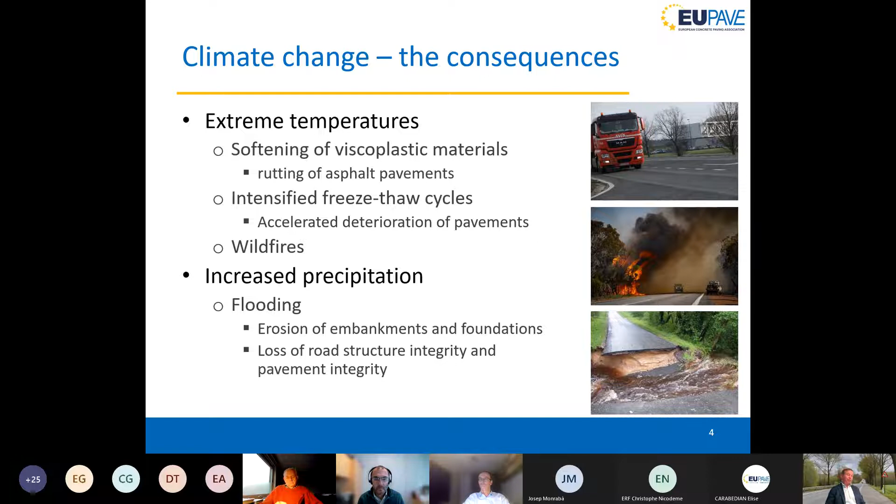And yes, we could be a bit more optimistic. However, if we look at the figures published by the European Environment Agency and the Joint Research Center of the European Commission in their technical reports, then it is not all that optimistic.

2011-2020 was the warmest decade ever recorded, with global average air temperatures reaching 1.1 degrees above pre-industrial levels. And the rate of increase for human-induced global warming is now about 0.2 degrees Celsius per decade.

An increase in frequency and duration of extreme temperatures is also projected, mainly in southern Europe. The projected increase in weather-driven fire danger in southern Europe is about 30 to 40% by the end of this century, compared with the end of the past century.

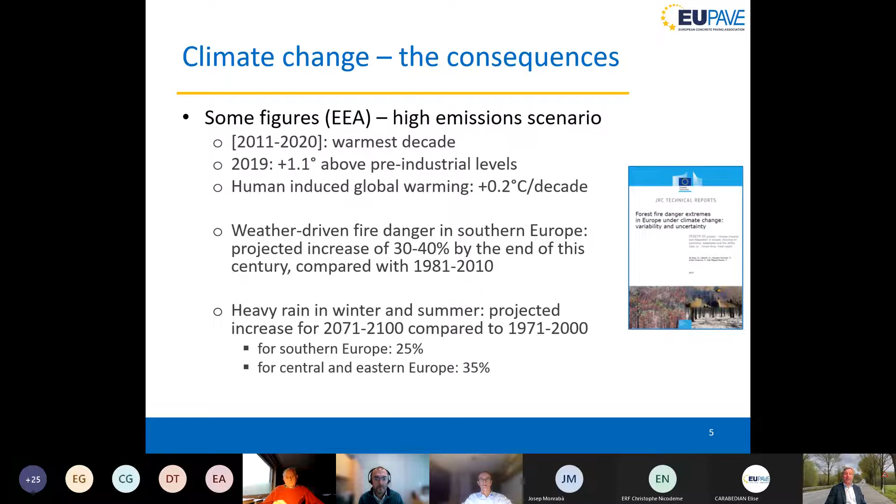The same is true for heavy rain in winter and summer for Europe. So by the end of this century compared to 1971-2000, you see increases from 25 to 35%. That is enormous.

Another consequence of natural disasters is the necessary removal of debris. Unfortunately, trucks carrying debris are unavoidable in the event of severe damage after floods or wildfire events. This transport consists mostly of heavy goods vehicles driving on roads that have not been designed for that. It means an increase in unevenness, less smooth surfaces, and also a faster degradation for asphalt roads was observed by researchers in comparison with concrete.

We know that rigid concrete pavements are less impacted by overloading and provide the highest resilience to flood and wildfire damage.

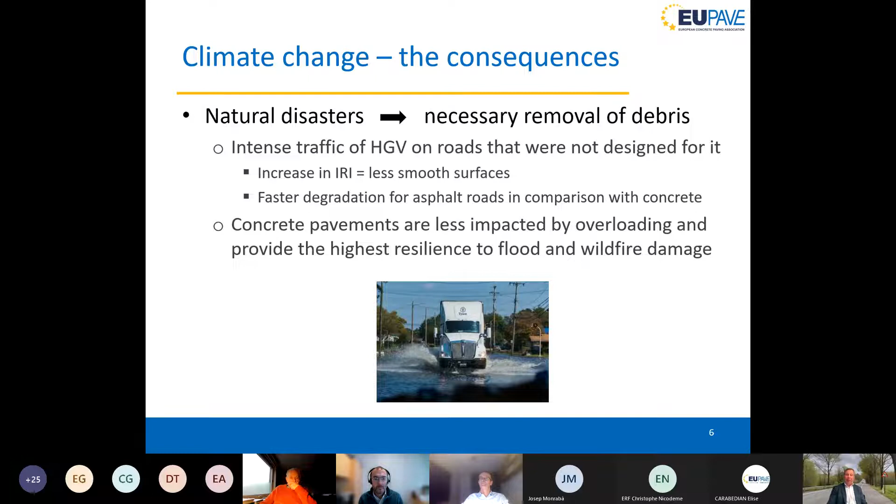A second effect is reduction of fuel consumption for heavy goods vehicles driving on concrete compared to asphalt. The following slides will give the figures.

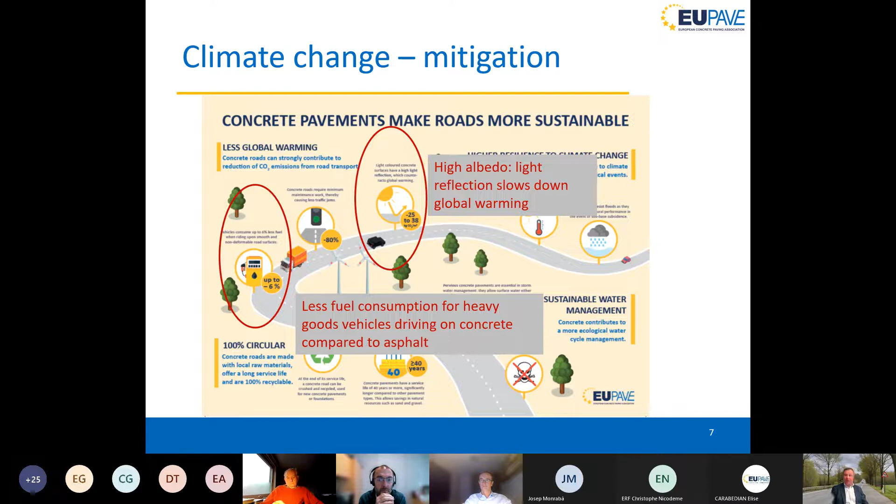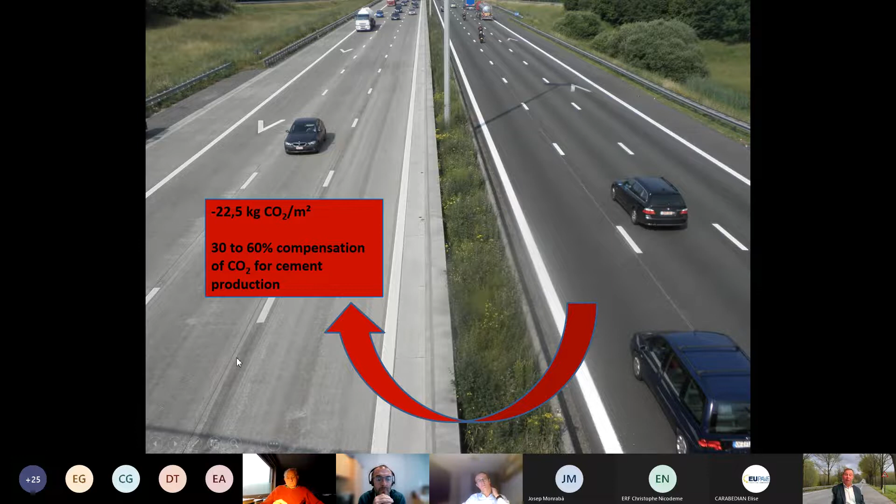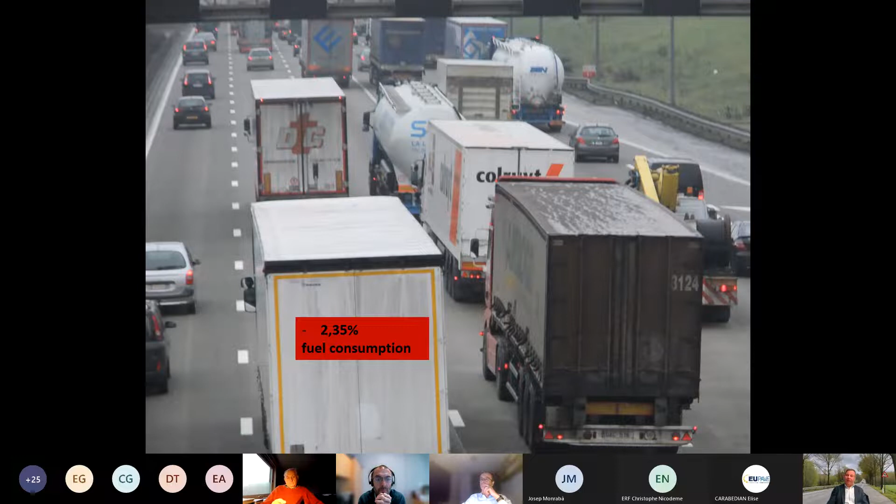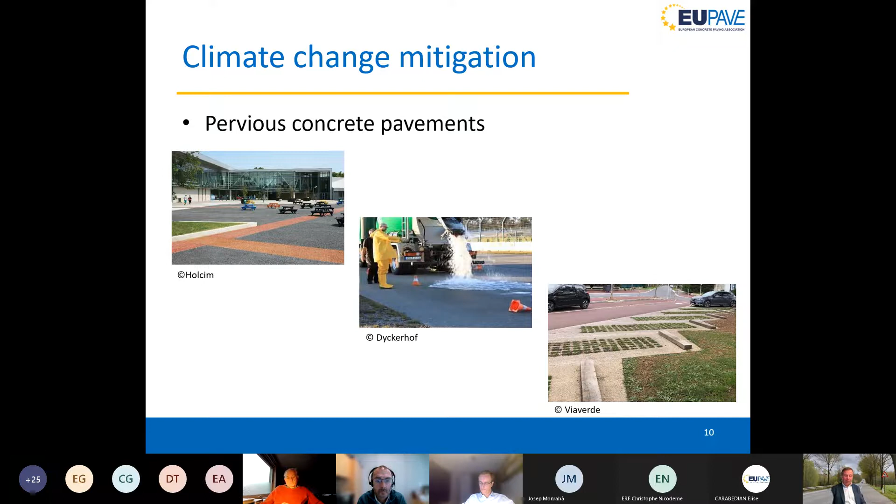Another contribution to reducing the risk of flooding is the use of pervious pavements. Both precast elements and in-situ cast pervious concrete can be used for this purpose. You see a few nice examples on this slide.

The societal benefits of a resilient, robust road network are numerous. First of all, it saves lives, thanks to the positive impact on road safety, and also by guaranteeing free traffic flow for emergency services, ambulances, and firefighters.

Secondly, it allows us to save money thanks to lower repair costs. In addition, there is a lower impact on the economy thanks to the increased availability of the transportation network. Finally, this is also better for the environment, since there are fewer impacts from emissions and use of resources for rehabilitation or reconstruction of the infrastructure.

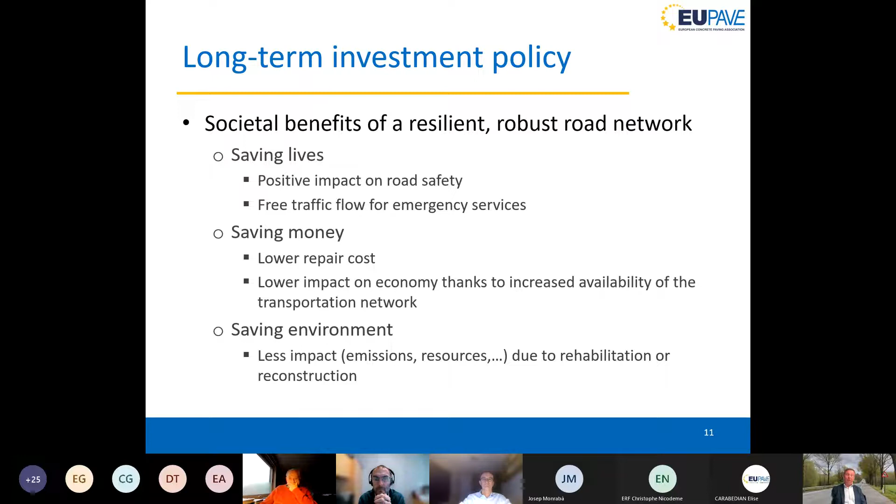Regarding the way to go ahead in building and adapting our infrastructure, I'd like to refer to a publication from the Organization for Economic Cooperation and Development, the OECD. It's called Climate Resilient Infrastructure Policy Perspectives, and I give you here a few statements.

Infrastructure will be affected by climate change, but it will also play an essential role in building resilience to its impacts. New infrastructure assets should be prioritized, planned, designed, and operated to account for the climate changes that may occur over their lifetimes. Existing infrastructure may need to be retrofitted or managed differently given climate change.

Concrete roads are part of that solution, either as a newly constructed pavement or as an overlay on existing asphalt pavement.

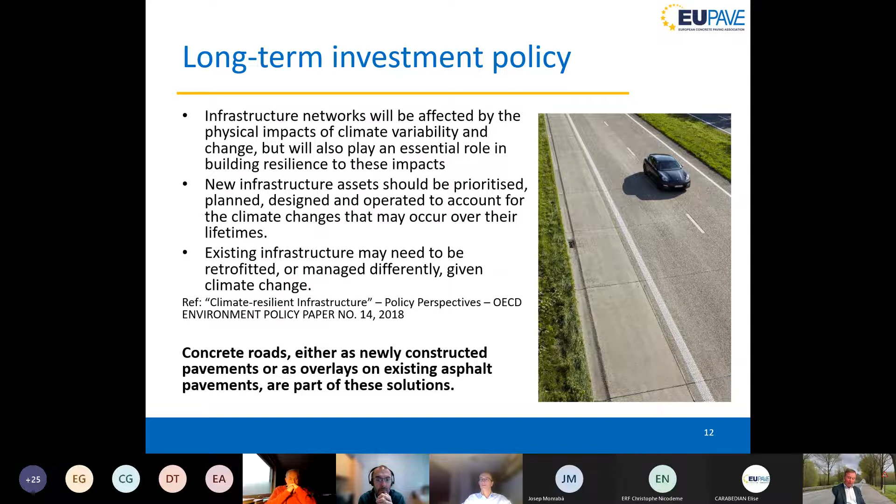It is important to ensure that decision makers have access to high quality information, to consistent data, so that they are able to manage climate related risks. And a final statement is that public policies should promote resilience and include public procurement processes that consider climate resilience when comparing competing bids, simply by accounting for the cost over the asset lifetime under those scenarios. Ladies, gentlemen, I thank you for your attention.

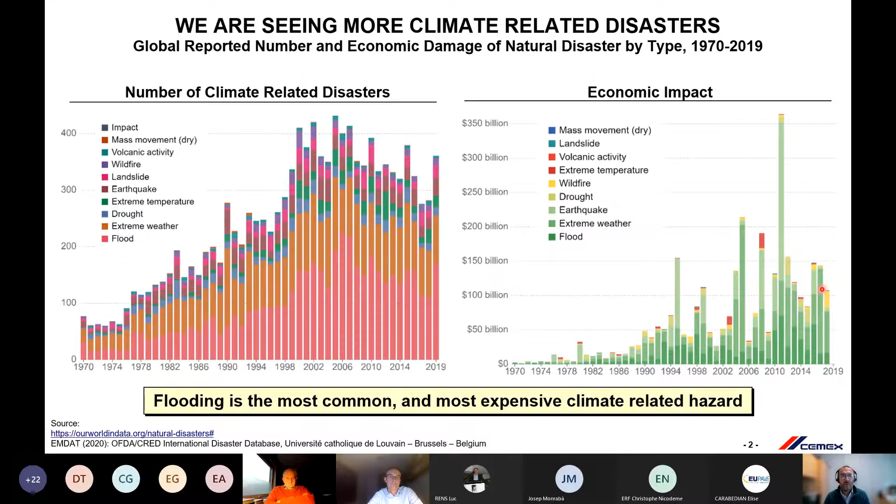So we see that it's a continuing trend. I'm going to focus on flooding because that is the big one. But when we look at flooding, we need to distinguish between two types of impacts.

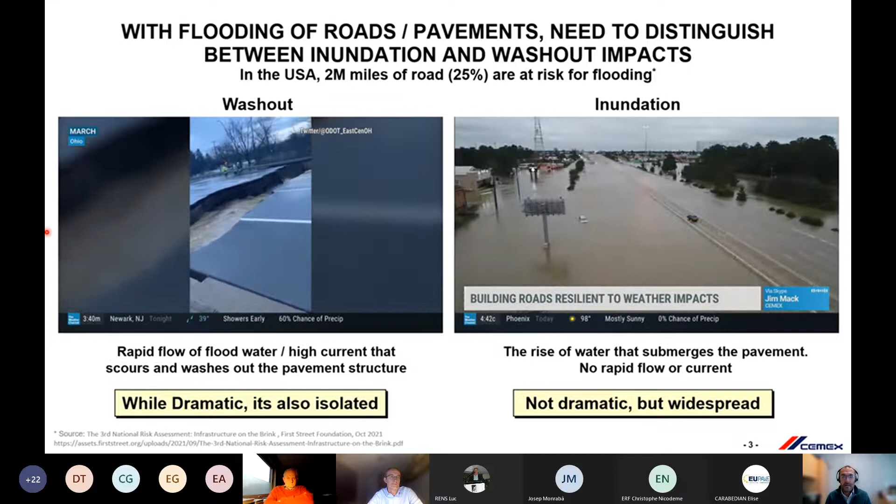What we see more of is the impact on the right, called inundation. It's not very dramatic, but it's much more widespread. This will cover hundreds or thousands of kilometers of roadway, while the one on the left might be one or two spots. There's no rapid flow of water here - it's just generally the rise of water, covering everything over a very large area.

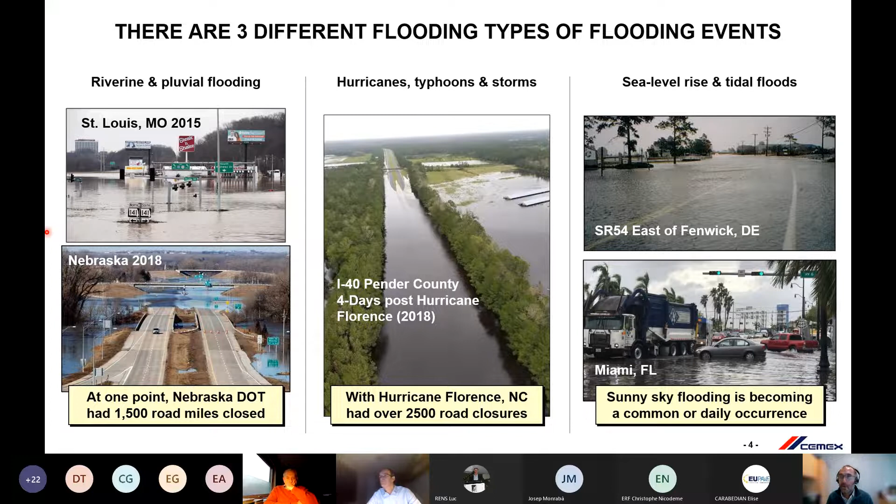We also have to distinguish between the types of flooding, or where they come from. There are basically three types: river flooding; hurricanes, typhoons, and storms that flood; and then something we call sea level rise or tidal flooding, or what we sometimes call sunny sky flooding here in the US.

Of these, I actually think river flooding is the most dangerous and probably the most destructive source. Here in the US, it happens mainly along the Missouri River, which runs right through here, and along the Mississippi River, and it can cover very large areas. The reason I think it's one of the most destructive sources is because you get both inundation and washout.

For example, in Nebraska, they had 1,500 miles of roadway closed just because the roadways were underwater. But you also get very heavy washouts in these areas - these are rivers, so there's rapid flowing water. When these rivers get out of their banks, we see that they actually destroy the roadway, so we get washout.

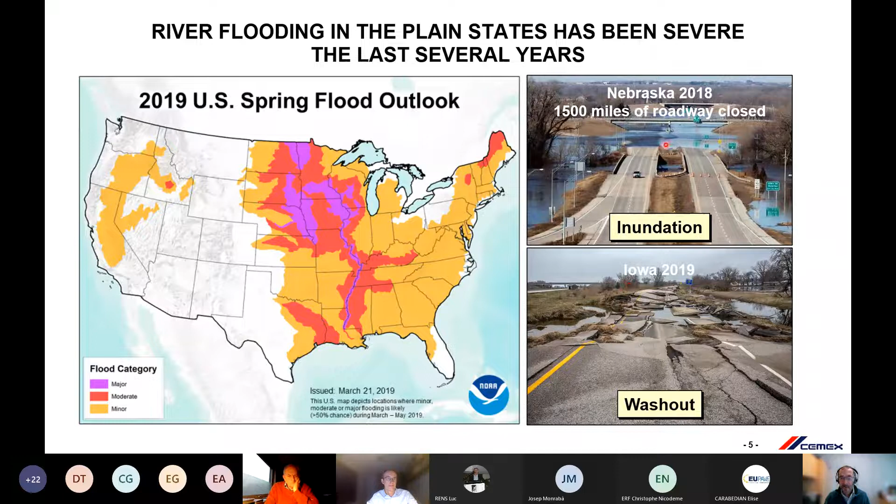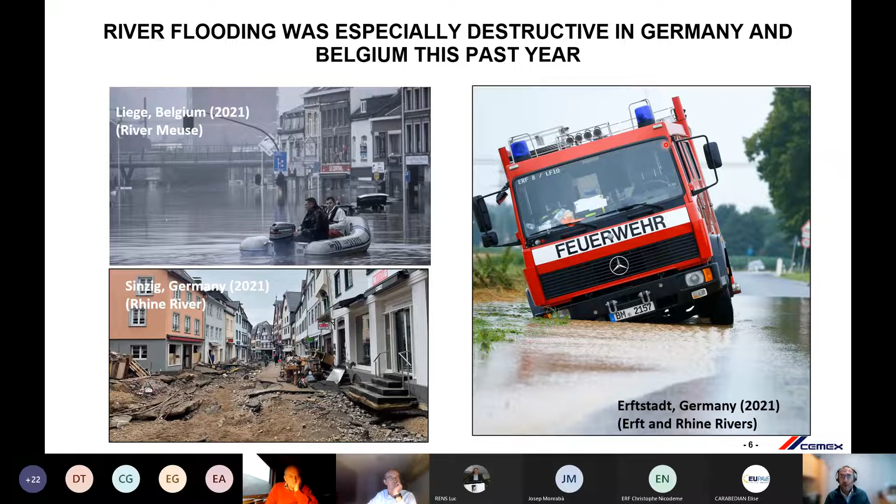And this is what happened this past year in Germany and Belgium. Again, from my perspective, from what I've seen, this is one of the most destructive river floodings I've ever heard about or read about. Typically we see the washouts over a small area, but what happened in Central Europe was a much more egregious case of what's going on.

The next type of flooding is what we get usually with hurricanes, or any type of heavy storms. These are typically inundation-type events. There can be some washout, but again it's usually just a large amount of area being covered.

Here in North Carolina, they had something like 2,500 miles of roadway closed at one time. Florida gets hit with two or three hurricanes a year, and it's very common for roadways and pavements to be flooded. This is my home area - I live in Houston, Texas, and we've had four hurricane events that have flooded Houston since I've lived here.

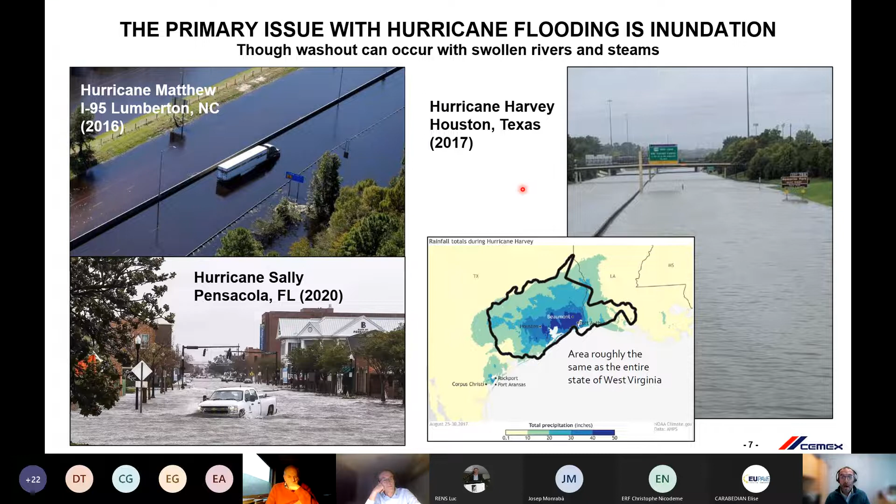I've lived here for about 15 years. The biggest was Hurricane Harvey, and it covered about 65,000 square miles. No washouts, but a lot of inundation - it was all just inundation flooding.

And the final one is sea level rise, and this is the most benign of the flood events. It's just the general rise of water. It can occur on a daily basis. It doesn't really impact much - there's no flow associated with this. It's just the rise of water, and we call it nuisance flooding or sunny sky flooding.

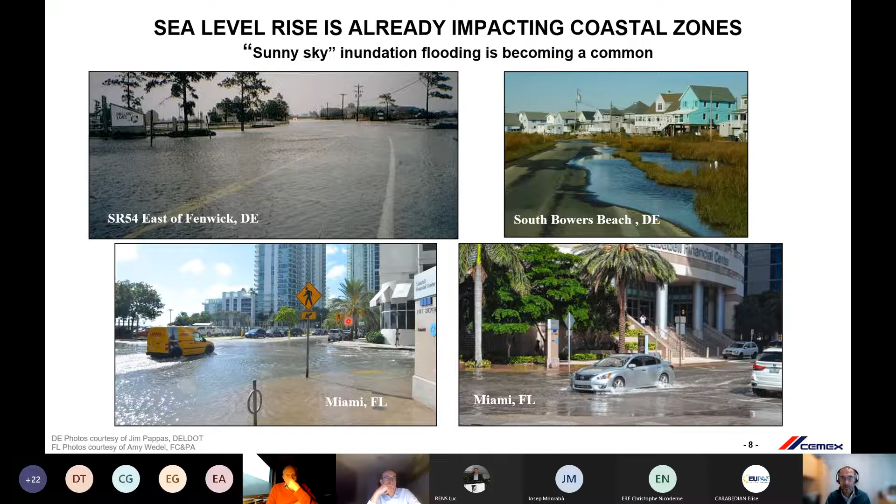While it kind of is inconvenient, it also does destroy our pavement systems over time, so we need to be able to address it.

Now, to start addressing resilience with paving and those events that happen, we need to understand how to define resilience and have a framework around it. This is a resiliency framework, and it applies equally well if you're a building dealing with fire, earthquakes, or a country dealing with a pandemic. This is the general framework it follows.

The way resilience is defined is I have a system performing at some given level of performance, and then the event hits, such as flooding. Resiliency is defined by two parameters: how big a drop in performance do I get, and how long does it take to recover? In this system, green is more resilient than orange because there's a lower drop, a faster recovery time, and it recovers to a higher level of service.

In this system, blue is what we call a hardened system, because what we're doing is building back better so that when the next event hits, we'll have a smaller drop in performance. We may still get a drop, but we'll still be at a level that we can deal with.

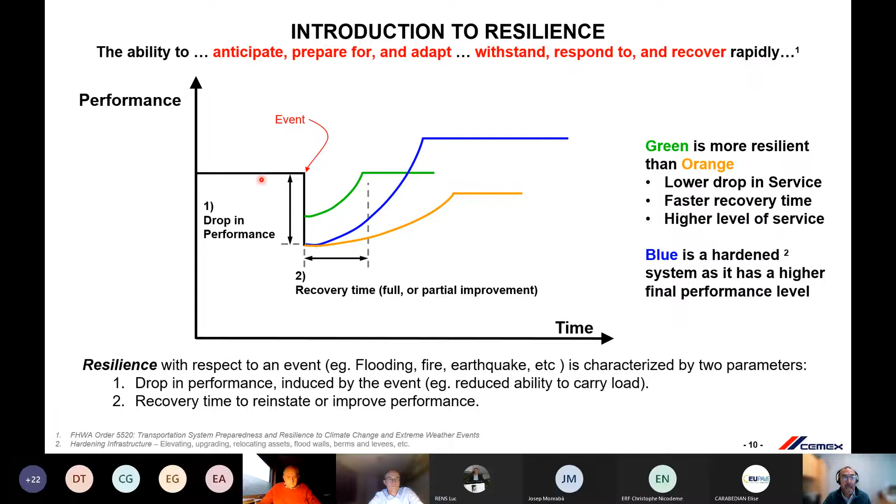Now, the issue with pavements and resiliency is that we have to define what performance is. There are two types of performance when it comes to pavements. There's functional performance, which is basically whether the pavement is open and can vehicles and the general public use it. It's relatively quick and easy to see - basically, can I drive on the roadway? If there are no washouts and no water on the roadway, I'm back to my functional resilience.

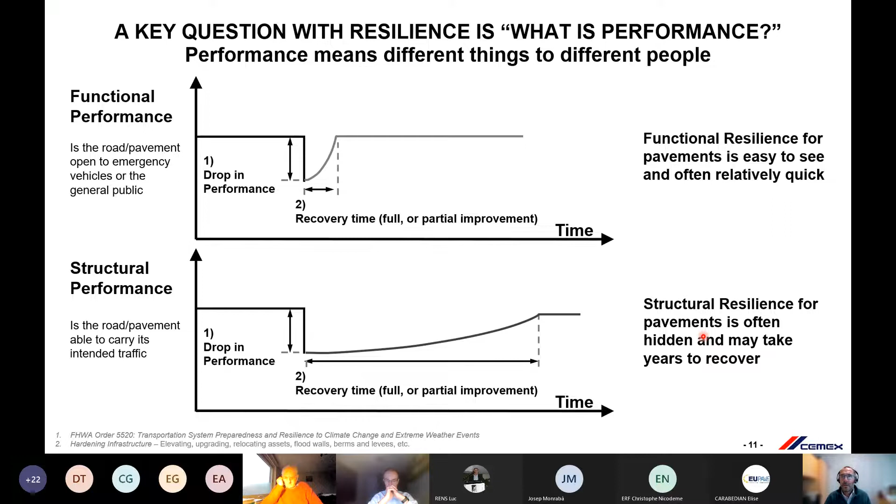The one we have to worry more about is what's called structural performance. This is the hidden one that nobody sees. Once a pavement is flooded, it can take years for that pavement to recover, and the entire time that pavement is being used, there's damage being done to it. We don't really see the issues until all of a sudden our pavement systems are being rehabilitated 5 or 10 years earlier than we were expecting.

We also have to recognize that when we have flood events, damage comes from two different sources at different times. There's the primary and direct impacts - that's my roadway flooding, or having a washout and being unable to use it. But the second is secondary or indirect impacts. Pavements are unique because not only do they have to withstand the climate change event, but they also play an important role in the recovery.

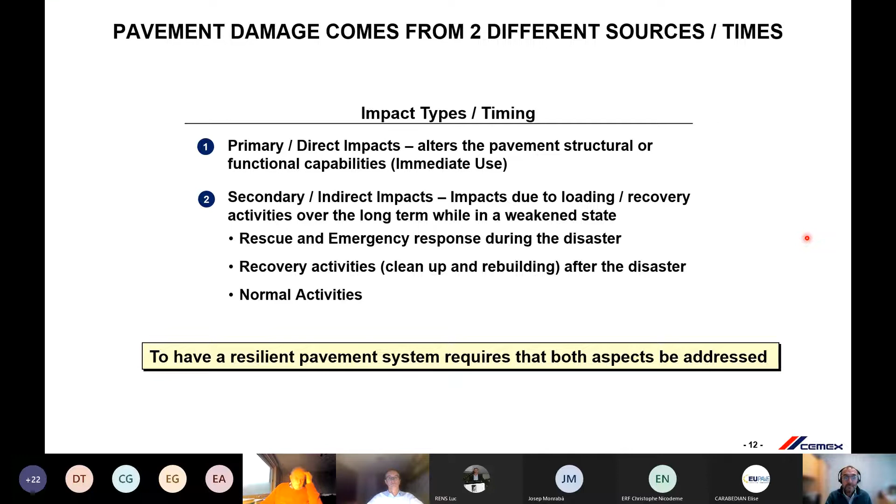We're going to use our roadways for rescue and emergency responses during the disaster. During the recovery, much like Luc talked about, we'll have to do cleanup and rebuilding after the disaster, and we're going to load these pavements. We're not going to wait for the pavement to recover - when people's lives are in danger, we're going to load these pavements. We're going to get people safe; we'll worry about that.

After these disasters occur, we have a huge amount of material to remove. This is, again, not too far from my house, after Hurricane Harvey in Houston, Texas. We had to remove about 200 million cubic yards of debris, and 65% of that was removed in about the first month. That's about 8 to 10 years worth of loading on streets that weren't designed for it - they just weren't built for that. So there's a huge amount of recovery loading, and then the rebuilding after - all the trucks moving back in to rebuild these roadways.

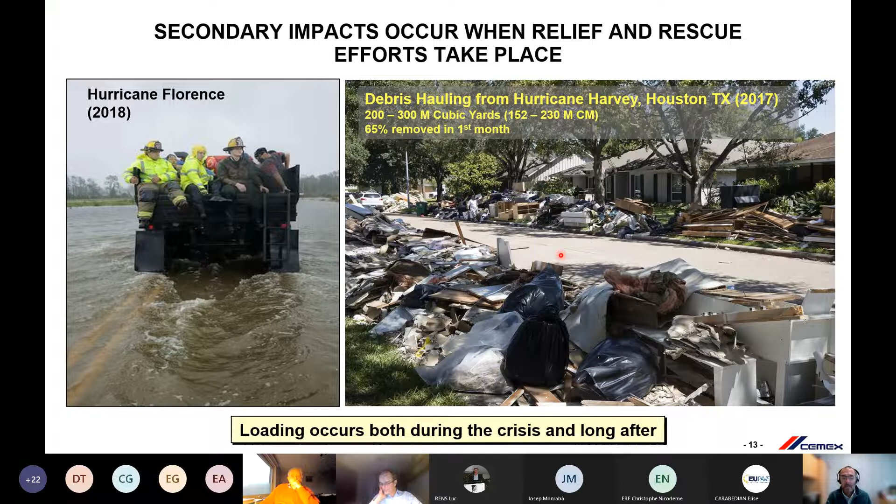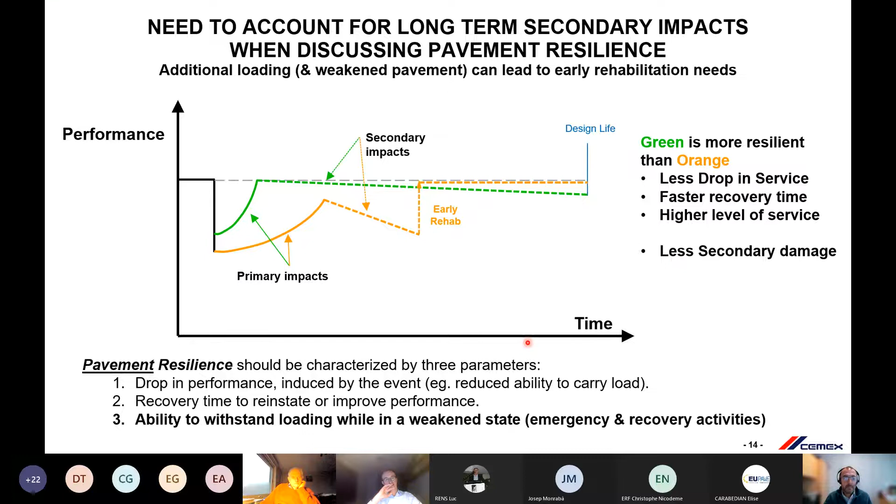So we need to be able to withstand both. When we look at pavement resilience, we have to deal with the primary impacts, but we also have to make sure we design around the secondary impacts too. Again, in this system, green is more resilient than orange because there's less drop, faster recovery, higher level of service, but also less secondary damage. So we need to design our pavements to withstand the loading during the weakened state.

So how do you do that? Luc kind of addressed this, and there's 3 ways to do it. One is we want to build in what's called robustness, essentially making a stronger system to minimize the drop in performance. The other thing we want to do is build in redundancy, so there are extra elements that take over in case of a failure. The easiest way to explain redundancy is to think about a city on a coast.

If there's 5 roadways leading into that city and one of those roadways floods, there's still a large amount of redundancy - there's 4 other roadways people can use to get in and out. But if there's only one road leading into that city and it floods, there's no redundancy and there's a great crisis going on. So we have to be able to build in those redundancies in our system.

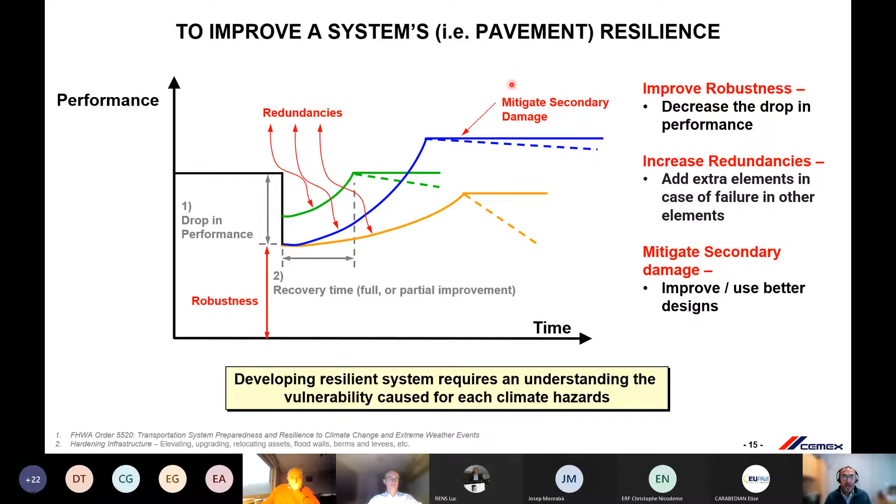And the final thing is we want to mitigate the secondary damage. To do all these things, you need to understand the vulnerability, and you need to actually design around these for each climate hazard.

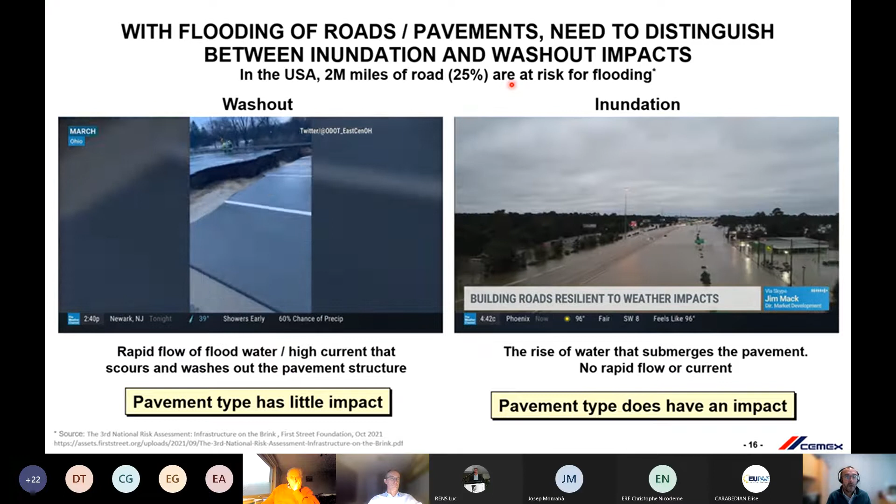So when we go to flooding, we go back and look at washout. And when we look at washout, pavement type doesn't have a whole bunch of impact - whether it's concrete or asphalt, both pavements are susceptible to washout. It's more about the structure and the things you build around it.

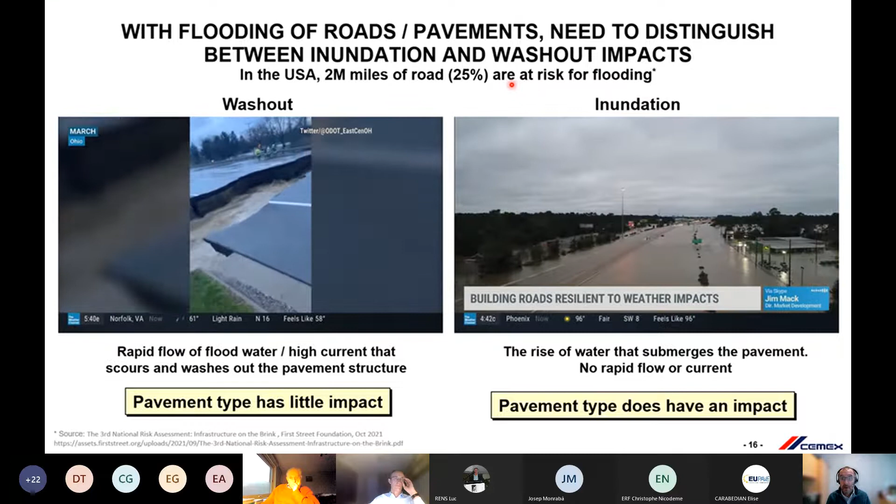However, for inundation, pavement type does have a large impact, and it plays an important role. I'm going to have to go a little bit technical on you for a second - when we design pavements, we design for what's called optimum moisture content and optimum density. So for the base material, the sub-base material, and the subgrade materials just under the top surface, we compact them at the right density so they're at their strongest level.

Concrete pavements are a little bit different. They deliver the load differently - the concrete carries the load, so it spreads the load out over a large area. We still want that optimum moisture density and optimum strength because it helps the system perform, but the main load carrying capacity in this pavement type is the concrete itself.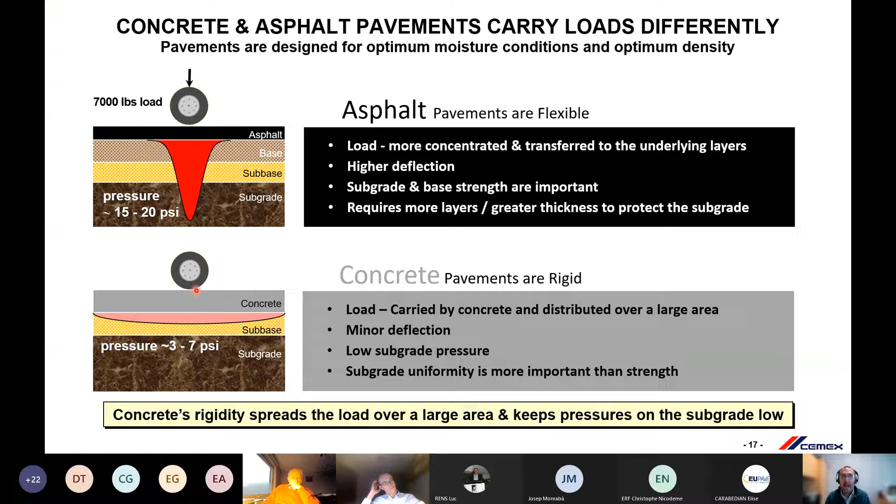Both systems work fine as long as they stay dry. The problem is when we have inundation flooding, that subgrade becomes what we call supersaturated - the water gets into the base and pushes all those particles apart. So this base, sub-base, and subgrade layer lose strength, and we lose load carrying capacity. Once the water goes away, it takes about a year for these materials to regain their strength, but the loading during that time takes away life from the system. It's a weakened system, and it just starts to accelerate the damage to it.

The concrete pavement - the materials underneath, the sub-base and the subgrade - still get supersaturated and lose some of their strength, but the concrete doesn't. It's still carrying the load. So even though there's less strength, we never stress it to the point where we actually damage those systems, and so we don't get the damage to the roadway of the concrete that we get with asphalt pavement.

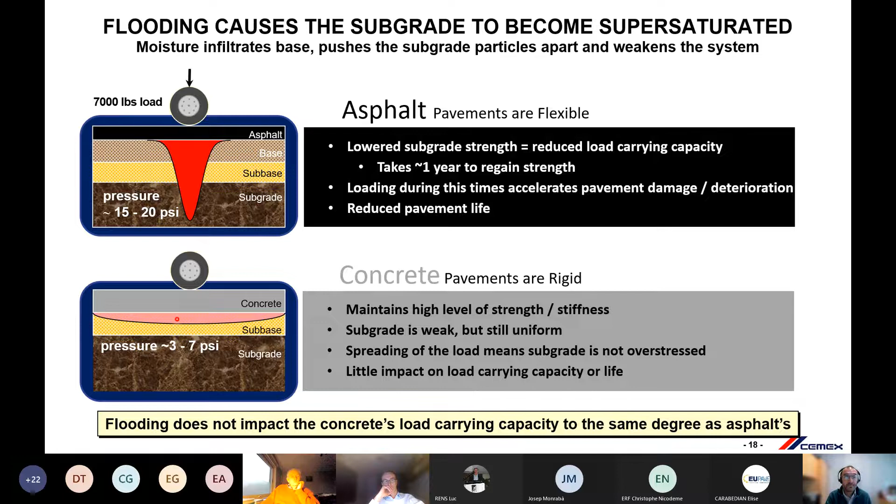And we can see this - this is some history from a pavement that was flooded in Florida. This roadway was flooded after a hurricane for about 2 weeks, 14 days, 10 days, something like that. The Florida DOT just happened to test the strength of it before this flooding, and this was the pre-flood strength. And this was the strength of the pavement system after the flood, for the 6 to 8 months after it - so we had this reduction of strength.

Now, this doesn't look like it much, but it's about a 40 to 60% load reduction in carrying capacity, and it was about 3 to 4 years off the life of this pavement. It's intended to be a 12-year pavement, and they lost a third of their life.

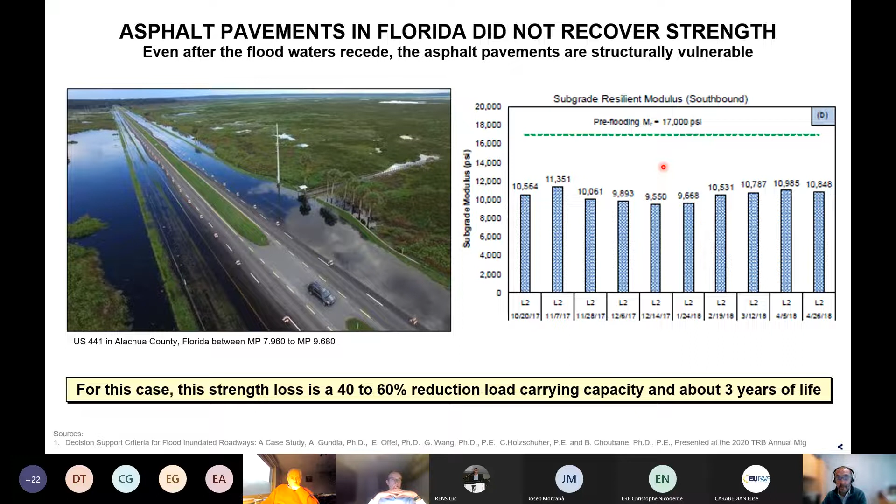You can contrast this with pavements in concrete and in Houston. Houston is a very concrete-centric city - we have very stiff pavements, we have cement-treated bases on them. And these are some of the flooding events we've seen.

They're flooded for 3 or 4 days. And in Houston, we literally put traffic on it. As soon as the water is about half an inch thick, we open our roadways and put traffic on them. We've gone out and tested these roadways, and we've had no damage.

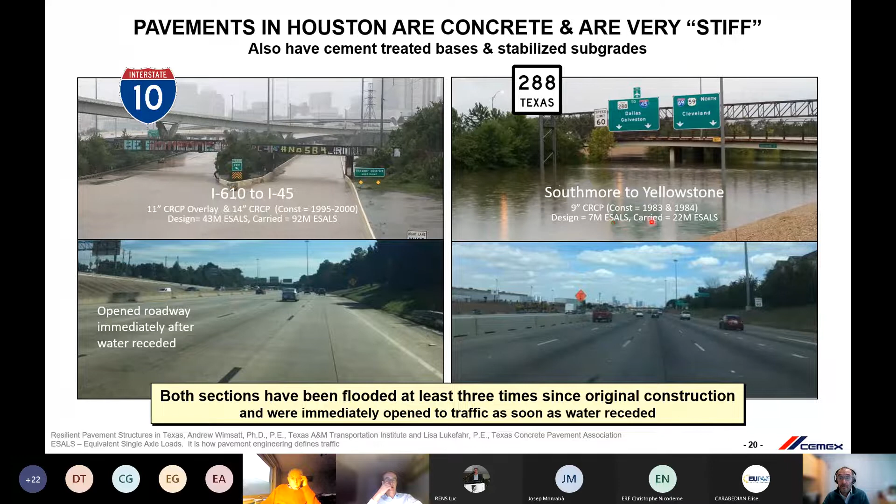In fact, we can tell because these were designed for what they call 43 million ESALs, a way to describe trucks that pavement engineers use, and it's carried 92 million ESALs. Here's another one: it was designed for 7 million ESALs and it's carried 22 million, 3 times more traffic. So what we see is stiffer designs work better.

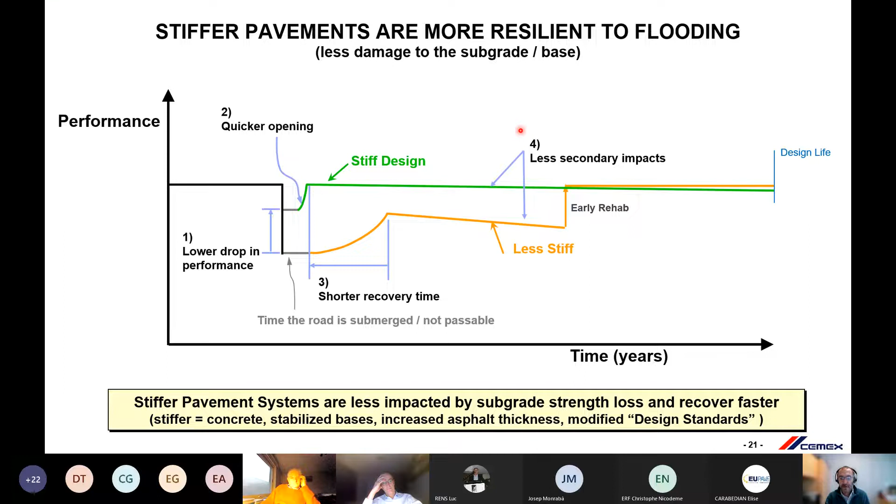You want stiff designs. They have a lower drop in performance, you can open them quicker, they have a shorter recovery time, and they have less secondary impacts. So the question is, how do you get there?

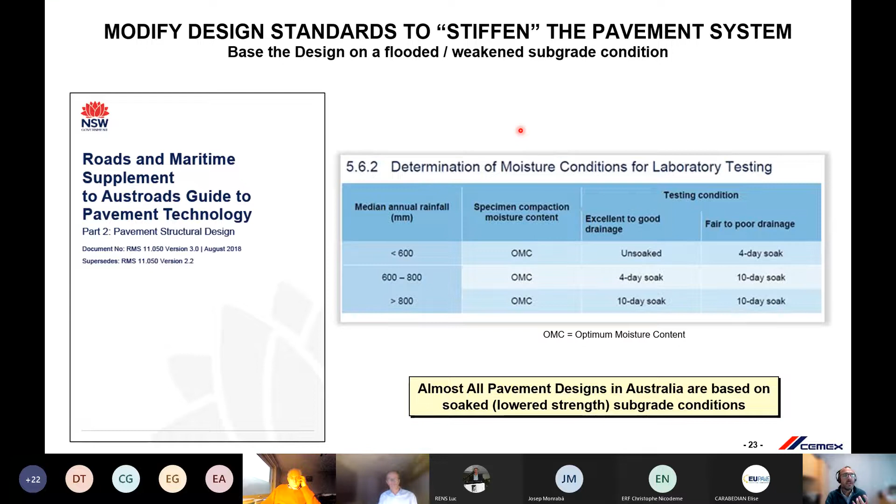Well, one of the best ways is with new pavements, and this is what Australia's done: they no longer design for optimum moisture content. They design for all their pavements to be flooded. They look at the amount of rain in an area and say, based on that, we're going to use what they call a soaked subgrade value. They actually reduce the strength of their subgrade in design, so they just build more robust systems from the very beginning.

Another thing you can do is stabilize the base. Luc talked a little about this, where they come in and take these unstabilized base materials and mix in cement, making it a much more resilient, robust structure, and again it changes the profile.

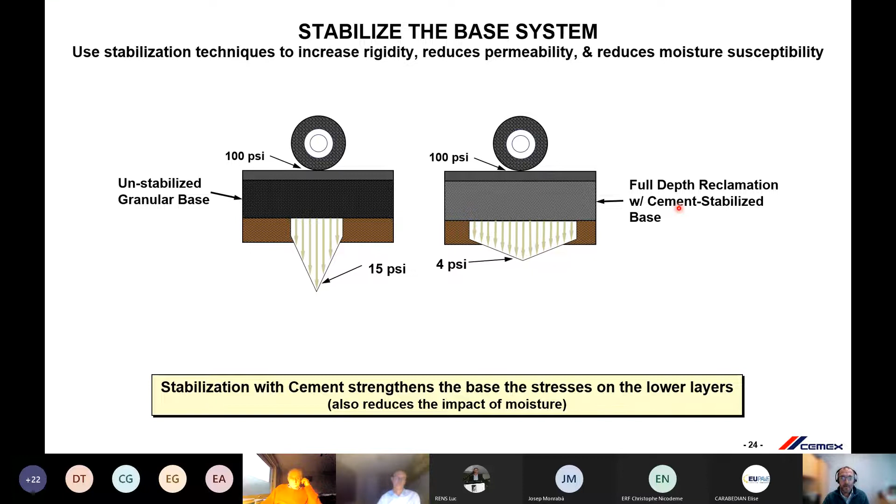My favorite is actually using concrete overlays, because with concrete overlays we get two things happening. One, we raise the road elevation a little bit, maybe somewhere between 150 to 300 millimeters. But more importantly, we change how the pressure is applied to the underlying layers. We go from a spike, which the underlying layers can't handle, to a much lower pressure diagram, which actually increases the structural capacity of the roadway.

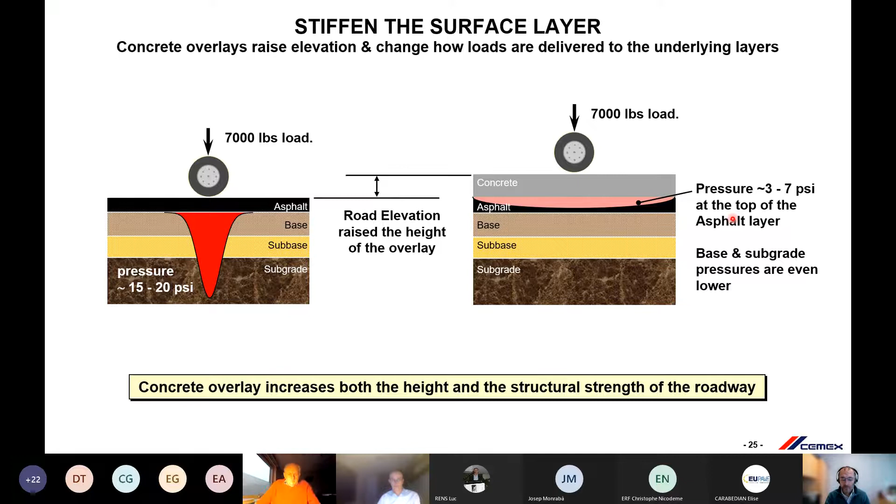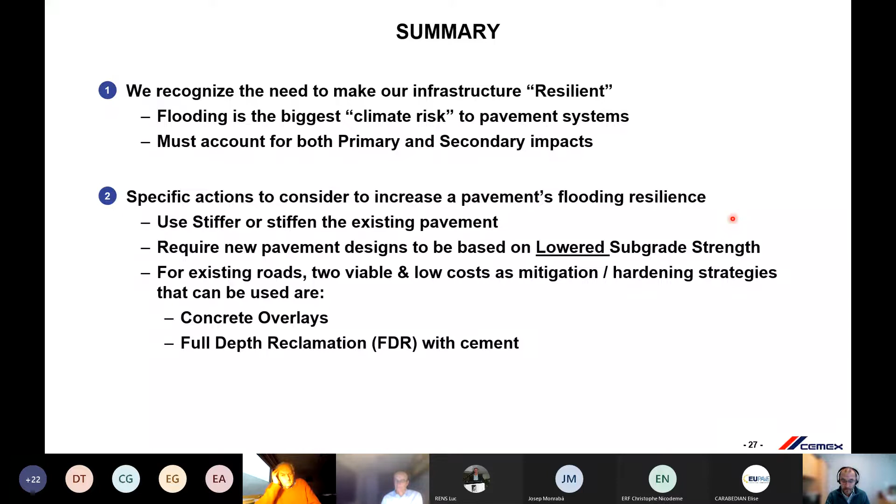So we know how to make our roadways more resilient. Flooding is a big risk, and we need to account for both the primary and secondary impacts. But there are ways to stiffen your pavements: concrete overlays, full depth reclamation, and designing pavements from the very beginning with a lower subgrade strength will make our systems more resilient. With that, I'd like to thank you again very much, and I'm open for any questions.

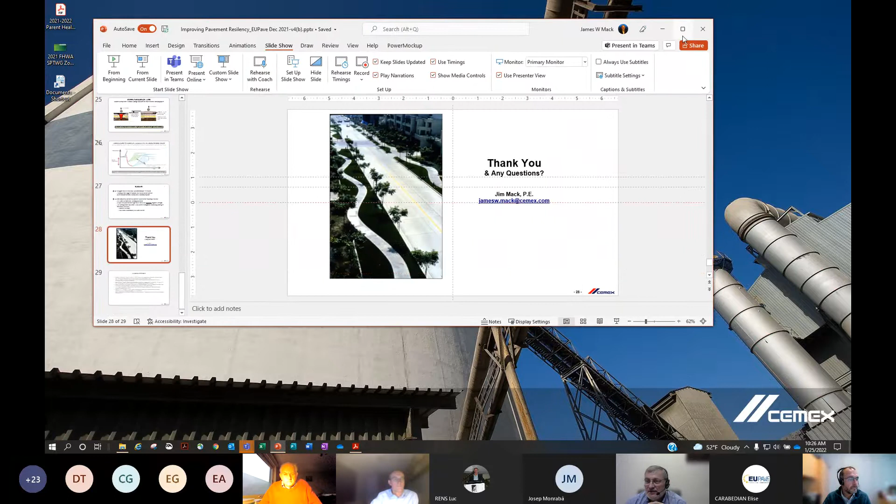Yes, thank you, Jim, for this great presentation, very interesting. I have several questions, but the first one is, what does the federal government do right now about road network resilience? Is it a big topic? Is it part of a Biden plan? What's going on with this topic in the US?

Yes, that's a great question, and in fact it's becoming a much bigger topic. It started becoming a topic probably about a year and a half ago, and now the states are all starting to talk about it. When they first started, everybody was talking about building bridges or raising the roadway over all their roadways. Everybody quickly determined that's not a very cost-effective way. You can't raise 1,500 miles of roadway in Nebraska, it's just not feasible. So they're starting to look at ways to harden their systems.

So people are starting to look at all these other solutions. It is a big part of the Biden Build Back program. Another thing states are doing is focusing on where they're having problems, mapping out much better where our pavements are going to be flooded and how to upgrade those. One thing Luc talked about earlier was competition, and in several states they're looking at wanting more competition between the concrete and asphalt industry. We need to build more resilient roadways. Concrete is more resilient, so let's put concrete in those flood-prone areas, and that's kind of where they're looking at putting a lot of concrete pavements now.

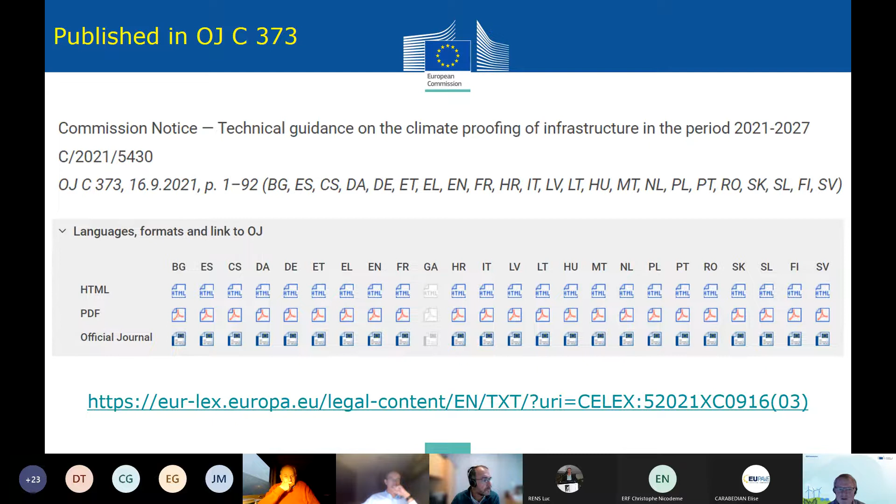So the new guidance is for the period 21 to 27, but it builds on lessons learned from major projects in the previous 7-year budget period from 2014 to 2020. Major projects are large infrastructure projects from 50 to 75 million euro and up. So many EU member states are already familiar with climate proofing of infrastructure, like in transport.

So what we have now in the period 21 to 27 is several things. The overall climate target for the EU long-term budget has increased from 20% in the last 7 years to now 30%, meaning more climate action. And climate proofing will cover more EU funds than ever before, and a wider range of types and sizes of infrastructure projects, so it will no longer be restricted to so-called major projects.

As regards the mitigation of climate change, the guidance includes an updated and more ambitious approach to the quantification and monetization of greenhouse gas emissions.

As regards adaptation to climate change, the climate vulnerability and risk assessment benefits from various developments, for instance the large investments in the European Space Programme and the EU-funded Copernicus Climate Change Service, which now makes reliable and quality-assured climate data available for free to support climate resilience work.

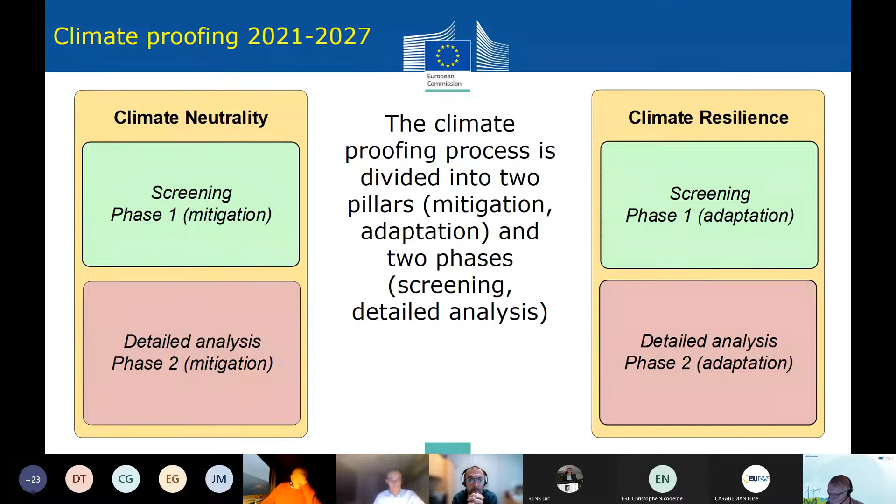A range of EU funds may support investments in infrastructure, and you find in the fund-specific legislation the definition of what is eligible infrastructure under that particular fund. The climate proofing guidance is drafted with a wide range of infrastructure in mind, so it's not focusing as such on road transport infrastructure or road pavements.

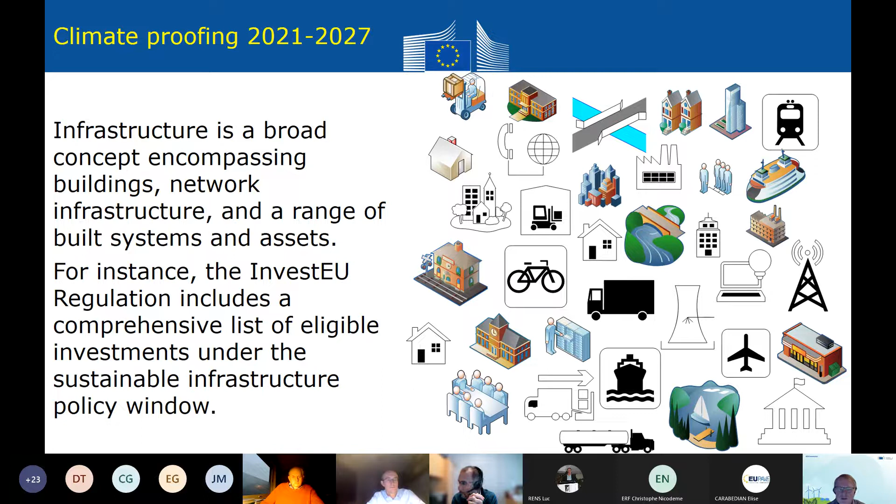The guidance includes a screening list of various types of infrastructure, including transport, which in many cases will simplify the work. In other cases, like inland waterways, it may be necessary to estimate the greenhouse gas emissions and compare with threshold values in the guidance.

The detailed analysis in phase two includes quantification and monetization of greenhouse gas emissions, which the guidance refers to the carbon footprint methodologies of the European Investment Bank, the updated shadow cost of carbon published in the EIB Climate Bank Roadmap.

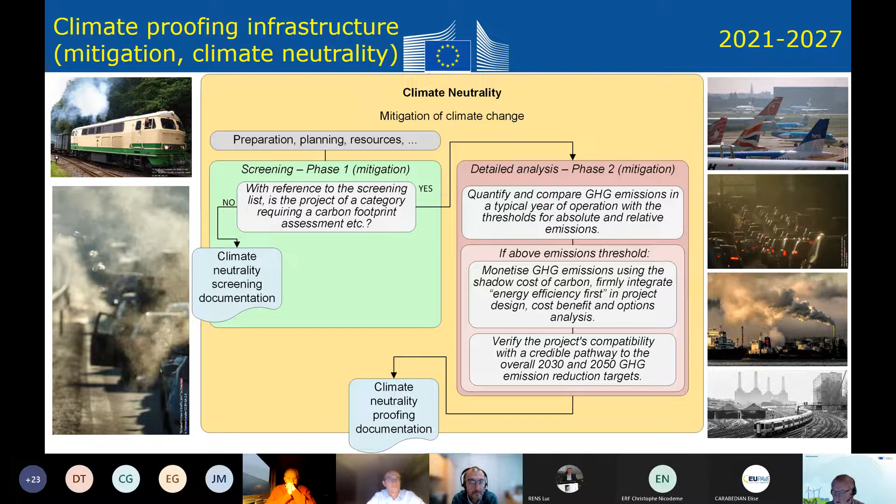If we move on to the second pillar, climate resilience, the approach aims at identifying and assessing the climate risks, which then can be addressed through relevant adaptation measures. These measures will have to be identified, appraised, planned for, and implemented.

There is considerable uncertainty involved in this exercise, among others from the future level of greenhouse gas emissions and global warming, which, notably for long-lasting infrastructure, warrant regular monitoring and follow-up of critical design assumptions. We cannot build our infrastructure and then just leave it without keeping an eye on it.

But on the other hand, the guidance provides for flexibility and stepwise adaptation, which can be more cost efficient and attractive. In addition, infrastructure investments should give due regard to adaptation strategies and plans at various levels of governance - member states, regional, local.

Finally, the climate proofing process and related decisions should be documented, which you find in the middle of the slide at the bottom. The documentation will usually be an important part of the investment decision.

The climate proofing documentation is intended as a relatively short, summarizing document, typically in the range of 10 to 20 pages. However, it should be possible as part of the preparation of the investment decision to query and obtain further insights into the underlying documentation from the project developer.